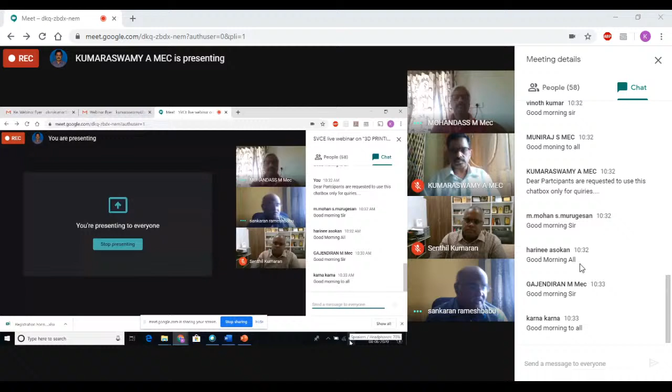I take privilege in explaining a few features of our department. Kindly bear with me. The Mechanical Engineering Department was established in the year 1985, the moment when the college was established. The department offers one UG program, Bachelor's in Mechanical Engineering, accredited by the National Board of Accreditation since 1998. And we have two PG programs, one in mechatronics and the other in industrial automation robotics. The second one, industrial automation robotics, we are waiting for approval from AICTE. I think we have a positive response from them.

And we are starting this course in the coming term onwards. The Department of Mechanical Engineering is a research center recognized from Tamil Nadu, and we have registered our research center. At this moment, I wish to mention Dr. K. Senthil Kumaran, who is one of our advisory committee members in recommending the syllabus for industrial automation robotics. We are unique in framing the syllabus for industrial automation robotics. In what way are we unique? We have framed the subject content in such a way that it reflects the current industrial scenario. So if you see the syllabus, if you see the subjects, all the subjects will be covering the key elements of Industry 4.0, and also we have been focusing more on the laboratory part also.

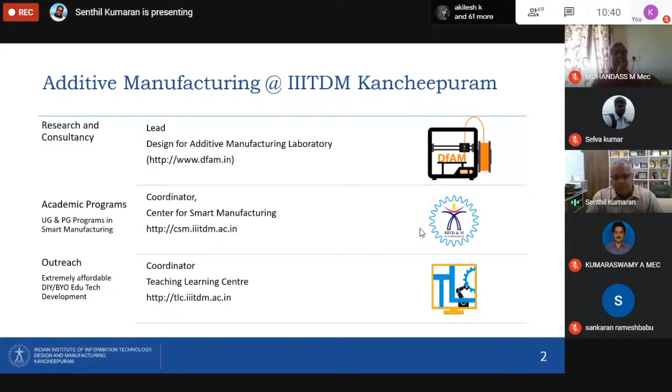Additive manufacturing has been one of the key turnkey technologies for many industries, especially for three reasons: one is to cut cost, second is to remain more efficient, and third is to introduce a new product into the market. So these are the three areas in which additive manufacturing really fares well.

Now, I have a certain notion when I say 3D printing is being adopted very fast in industry. That's because of various developments that have taken place. For example, materials is one, and then we have process, and then science, and design. Today I'm going to talk more about design rather than materials, process, and science. We do a little bit of work on materials as well as science, and process too, but today's topic is more related to design.

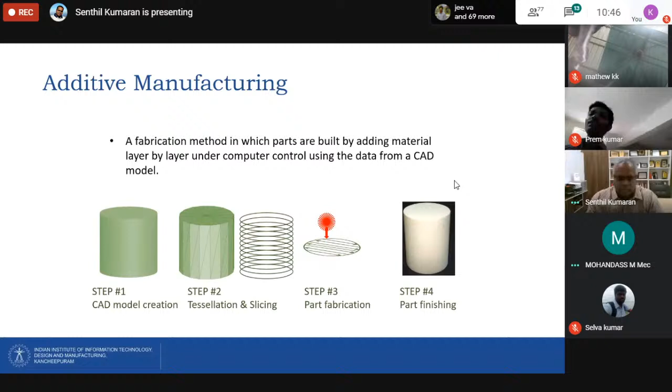Why do we need to do this? For example, sometimes you have a technology wherein you can print the entire layer, but in some technology you can only print one strand at a time. So there are technologies which could print the complete layer, and there are technologies which could only print, I would say, an array of 1D channels.

So in order to effectively classify them, you have many starting materials, like liquid polymer, discrete particles, molten materials, solid sheets, but different kinds of technologies. What happened is that the ASTM said there are too many acronyms, like stereolithography, SLA, selective laser sintering, SLS - there are so many different types of processes. Almost 50-60 processes which have been there for the last 3 decades, and 5 of them are commercially successful.

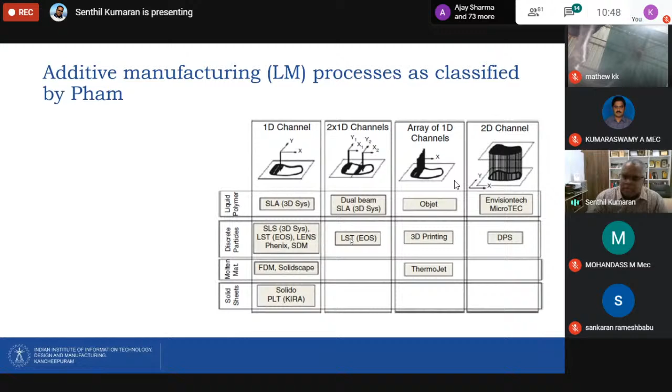So in vat photopolymerization, what we typically do is take a vat filled with liquid, and there's a laser which comes from the top and scans the liquid layer and fuses the particles together. In powder bed fusion, you take a layer of powder, put it on a platform, and then the laser comes in from the top and consolidates the powder particles selectively wherever you need to fuse the particles together. That is powder bed fusion.

Material extrusion is like an extrusion process where you have what you call a nozzle, which is a heated liquefier, and then there's a 2-pinching roller which takes the filament. So the raw material is in the form of filament. The filament comes in and fuses - the fused filament is deposited, just like a jalebi where you're squeezing or making a muruku or something like that. So it's like you're squeezing the material and making a layer.

And then you have material jetting. So essentially, which is like your normal HP inkjets and laser jets. Very similarly, like an inkjet process, you have a material which is a resin, and you are just jetting. So you use the same type of technology used in inkjet printing, but here the material is not ink, it is a resin.

So the resin is going to be jetted onto the surface by using something called, there's a similar name, a pump, or sometimes it's called a cartridge. So you have what you call drop-on-demand type of techniques, where droplets of resin are going to be deposited on top of a layer. So you have several of these techniques.

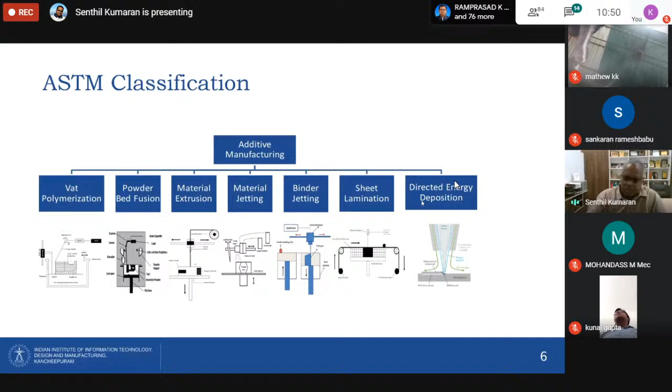The ASTM classification is usually like this. Okay, so now we are going to the design part of it.

I think this is a very important quote which I would like to tell you. Albert Einstein said the best design is the simplest one that works. So that means you have a design, but you need to make it as simple as possible. That is the idea, that is the notion.

We call this principle, probably you must have heard about it: keep it simple, stupid. So what this means is when you are designing something, you always keep it so simple, so that there are many advantages that you get out of it.

So maybe you have a design which is to be manufactured. Either it's going to be very costly during the manufacture, or sometimes it may not be manufacturable at all, or there can be some constraints. For example, the tool cannot reach, or the part cannot be taken out of the mold.

So there are a lot of issues with the design when you make it complex. The notion of simple design is to address the issues in cost, and even usage—when you are using the product, it's so simple that it becomes easy to service. So then it gets complex: design for manufacturability, design for assembly, design for serviceability, design for quality. All this design for X is going to be really difficult.

So in order to solve this issue, what people did is simplify the parts. So if you look at the design procedure, how people start designing components.

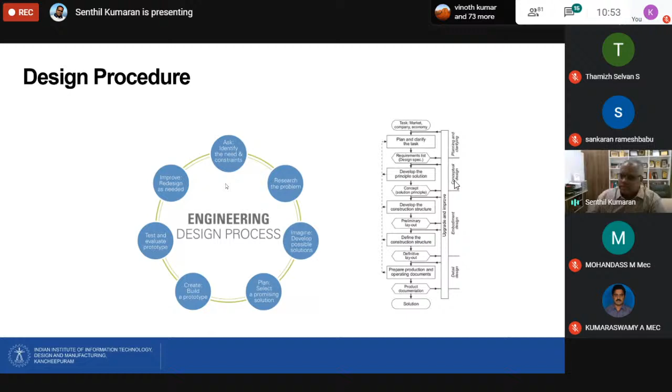To address this cyclic issue, one of the things we should look at is whether it's possible to do steps concurrently. For example, some manufacturing and testing can be done concurrently. So there are a variety of tasks which could be done concurrently.

But one of the issues is when you have a product, your cost of design is very high, and the cost of production is also very high. Let's say this is design cost, this is production cost. Now what happens is, if you spend a little amount of money in design, you spend a lot in production. But if you spend a lot of amount on design, the cost of production comes down.

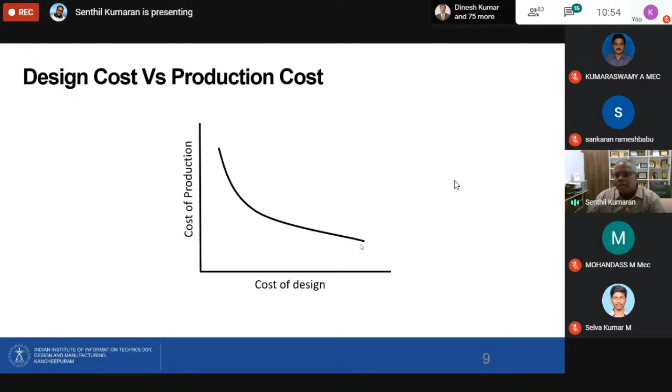So essentially, what this tells you is if you spend more time on design, catering to the needs of manufacturing, or addressing the issues early on, your production cost can be minimized. If you are able to bring some decisions very quickly early on, you can eliminate the problems you would otherwise face at a later stage. So this is the idea.

And so here comes the topic. When we are discussing this, one of the important topics is mass customization. So what we call customization, and what is called standard and one-off design. Now let's just look at this.

When we look at cost, we also look at time. If you look at the World War era and before, many standards have been developed. The entire world is made up of standards, like the building you're sitting in, the Bluetooth you are using, the IEEE standards, building codes, mass, time, and other standards. You have standards for exchange of CAD models like STEP files, IGES files. So you have standards everywhere.

People make standards to make life easier. Similarly, people make standard designs. For example, if you want interchangeability in your design, let's say you want to buy a nut here and a bolt in another continent, you can still assemble them together. That means there is interchangeability. If you are standardizing your design, you are able to replace it very quickly, and your availability becomes very large.

So standard designs have been around for a very long time. People make standard designs because they help with interchangeability, and they help address cost issues as well as availability, serviceability, and other issues.

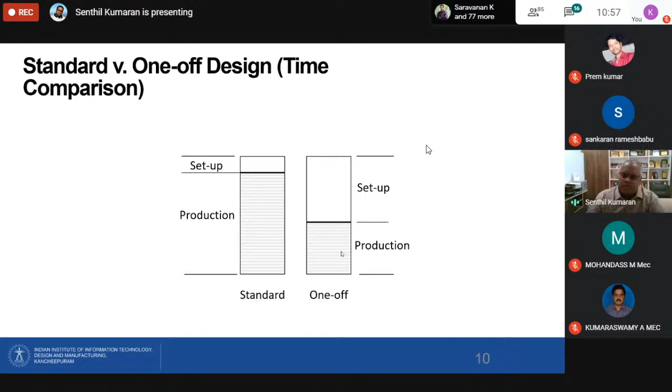If you look at conventional manufacturing processes like stamping, car manufacturing, injection molding, or even machining -- for machining you need jigs and fixtures, for injection molding you need a mold, for stamping you need a die. Making this die is a very costly and lengthy process; making a fixture is another lengthy process. Only if you hit volume, selling large quantities, can you justify this cost. So if you are making a very unique, one-off design, you are going to incur a lot of cost in conventional manufacturing. That's the idea here.

Now, similarly, if you break down that cost further, into labor cost, factory overhead cost, development cost, material cost, testing cost -- for a standard design, the total cost is very, very low. Whereas for one-off designs, you have special tests, materials to address, development issues, factory overheads, technology overheads, design overheads, labor costs -- everything increases. So in conventional manufacturing processes like injection molding, if you are making designs that are unique for every customer, you incur a lot of cost. This is the background intuition I want to convey.

So what I'm trying to tell you is, comparing a standard design and a one-off design, the standard design becomes cheaper over time. When you hit volume, you get cost benefits -- your cost gets amortized, so your total cost gets reduced.

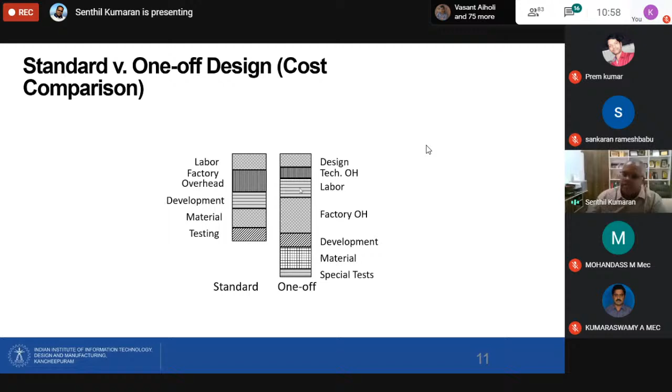Whereas with a one-off design, let's say you have a design which is uniquely manufactured, then it is going to be very costly. This is about conventional manufacturing. Here comes the mass customization angle, which we are trying to talk about today, and how 3D printing is going to help you in that.

Now if you look here, this is the mass production and mass customization curve. The one you see on top is called the mass production curve, and the one at the bottom, which actually rises to the top at the end of the high volume, is what we call mass customized. So you have mass customized and mass produced.

Essentially what we understand from this curve is that if you produce very low volume, mass production is going to be extremely expensive. Whereas if you produce very high volume, mass production is going to be extremely cheaper. So it's not going to be expensive, right?

But the problem is people are making widgets after widgets, making the same part again and again. But a lot of the time, the customer may not prefer the same design.

For example, I don't know how many participants here are women. Let's say you go to a sari shop and you see all the saris are the same - nobody will buy. You need different colors, different varieties, so people can pick and choose one, they can wear one. Suppose if you go to a shop and they have only five varieties of sari, but the shop is full of those same saris, nobody will prefer it. Anyway, you go to a car company, they have only one model, whether you choose it or not.

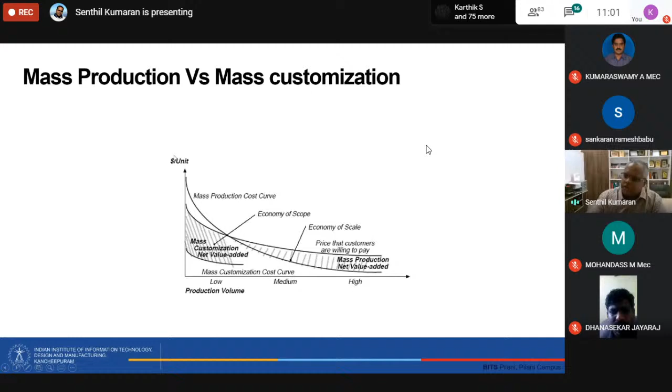But how do you reduce this dollar per unit? This is what is very important. When you are customizing it, your volume is going to hit low. At that low volume, how do you basically reduce the dollar per unit, or the cost per unit, of a particular product to be manufactured? So this slide is an extremely good slide with an example.

The same curve I'm trying to explain with intervals relating to the fourth industrial revolution, or Industry 4.0, whatever you call it. Let's say you take a car like the Model T, which belongs to the second industrial revolution. This car is the highest mass produced car - I would say the first mass produced car. The highest number of mass produced car is the Beetle, the Volkswagen car.

And suddenly you see that after 2000, people started decentralizing the production, making it distributed, personalized, and manufacturing of complex products. So essentially, what we are trying to address here is the issue that we are moving slowly from mass production to mass customization.

Essentially, we are trying to make a lot of unique or one-off parts rather than a standard design. So 3D printing actually reduces the cost if you are making only one part. Let's say you take a simple design through a stamping process — you have to make a die and then make the component. Whereas with 3D printing, you don't have to make a die, so it's a die-less manufacturing process, which reduces the cost. You can even hit the complexity factor too.

You can make more complex, more customized, and less costly individual or single parts. So conventional manufacturing may be a little costlier for this type of application. That's why 3D printing is taking center stage — it's considered to help with the mass customization angle.

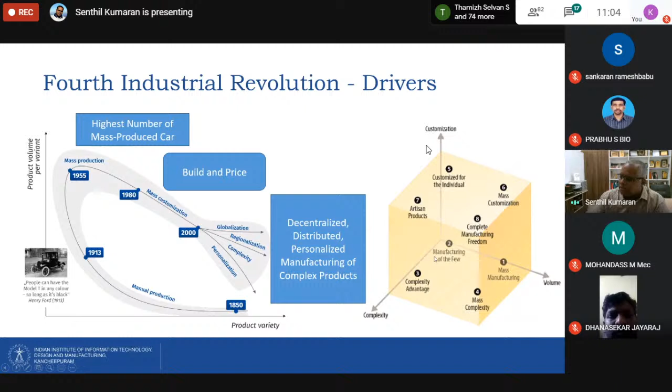So if you look here, this is what we call mass customization, this is mass production, and this is mass complexity. Let's look at this graph a little more clearly in the next slide. So what is mass customization here?

For example, you go to a doctor for footwear and want to create an insole — the insole can be customized according to your foot geometry. Or components can be customized according to your personal anatomy, or customized for individual regions or persons, or for specific applications.

There are parts manufactured only once, depending on what the customer needs — they can tweak the design and fit it to that. For example, implants: people have faced a lot of issues with implants, but now implants are custom made. People can design something unique to their body that fits exactly — dental implants, knee implants, 3D printed fixtures like dental fixtures. You're able to customize the design and make it very cost effective.

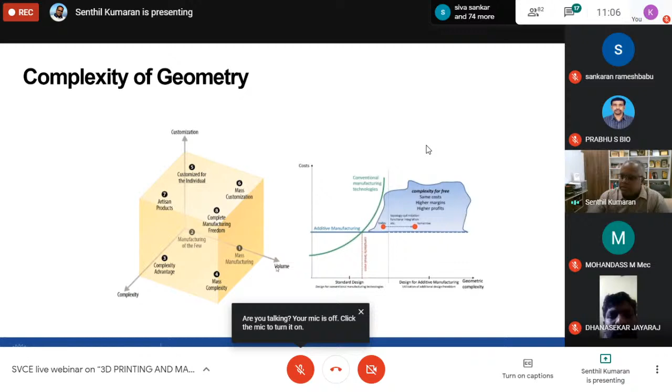That's the idea. Now, mass manufacturing with high volume is what conventional manufacturing like machining and injection molding are really good at, whereas 3D printing is good at this particular plane — it can give the complete manufacturing product and has a complexity advantage, where the design can be more complex. There are four different complexities which we'll discuss a little later.

We can have design complexity, especially called geometry complexity. We can have material complexity, hierarchical complexity, and other types of complexity. So you can build very complex parts, customize them according to needs, and also create more volume.

So volume at this point of time may be a little difficult with 3D printing, but over time, when the technologies improve and the process becomes faster, you'll be able to print more parts and build it faster. So that is the idea.

So as I said, we run a lab called Design for Additive Manufacturing Lab. One of the concepts in Design for Additive Manufacturing is, when you have more complexity versus standard design - this is the standard design, not customized. In standard design, when you design for conventional manufacturing technologies, the cost is very low.

Also, additive manufacturing is slightly not better positioned for these types of standard designs, whereas conventional manufacturing costs are lower than additive manufacturing. But when you move the design towards complexity as well as customization, the additive manufacturing cost doesn't increase, whereas the conventional manufacturing cost increases.

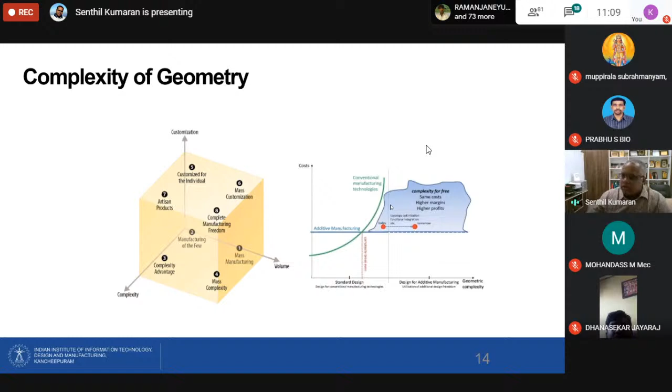So that is the idea of mass customization - the mass comes from both volume as well as cost. So now I will tell you a brief idea about what DFAM is.

I think when we are trying to address design issues, we always think design is mostly suitable for particular manufacturing aspects. Now, one of the ideas we always look at from the design side is that design is mostly restrictive. Even though we say that anything we can imagine we can manufacture, it's still not possible.

Many manufacturing processes wouldn't allow you to manufacture whatever you feel. For example, you would have seen Ford cars - they are nicely curved, whereas if you see the latest Tesla cars like the Cybertruck, they are not nicely curved.

The reason is because you have to make a bulletproof vehicle, and you have to cold roll it. The cold rolling process is not like the stamping process where you can achieve really good, nice, curved, classy surfaces. In cold rolling, you won't get the same nice curved surface - that's why the Cybertruck looks like a big box. So you have a difficulty in manufacturing that causes the design to change completely.

This is the manufacturability issue - the design is always influenced by the manufacturing process. For example, the nice curves and smooth surfaces you see are possible because some design cost has been incurred. So engineers always prefer very straight surfaces instead.

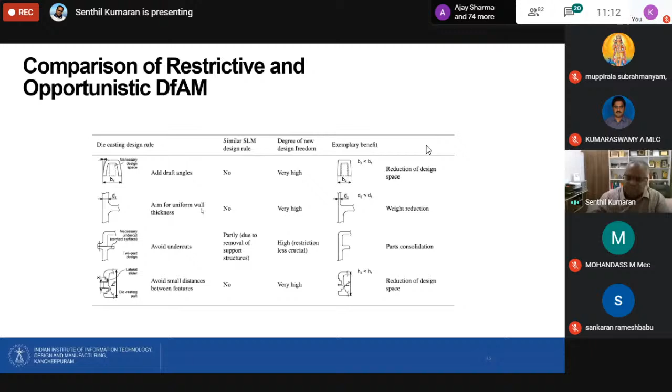So today we talked about mass customization. I will also touch on a few aspects which help you customize parts for individual needs. How do you customize a part? There are a variety of tools and techniques available where you can use these to basically customize your part.

Maybe you can use multi-materials, hierarchical structures, heterogeneous type modeling, lightweighting, topology optimization, generative design, or part consolidation. So the techniques we use to achieve design freedom, or increase the complexity of the design, is what we call design for additive manufacturing. It's like a collection of many different tools and techniques.

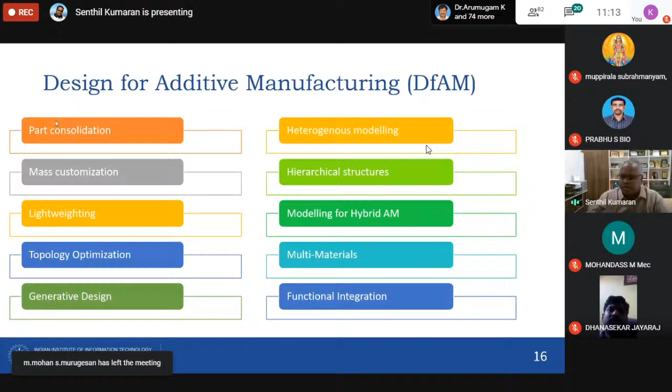Now let's look at design for additive manufacturing and what mass customization means. As I said, mass customization is customizing the design for personalization and flexibility while achieving the low cost of mass production. That is the idea of mass customization. So how do we achieve mass customization? How is it possible? How do I make sure mass customization is achievable? Now let us look at this particular slide.

There are many different tools and techniques to achieve this, including part consolidation. Part consolidation is the ability of the design—you can have so many different parts, but the problem with a large number of parts is the ability to make and assemble them. If you have a lot of issues in the assembly stage just because you have too many parts, you can consolidate them. 3D printing allows you to consolidate too many parts into one, combining them together to achieve a single part. This is what we usually call part consolidation.

You can also remove volume through lightweighting and intricate lattice structures, use heterogeneous materials, generative design, or hierarchical structure. These are various techniques. Hierarchical structure is about repeating structures at different scales—you may have the same structure repeating at a micro scale, a meso scale, and a macro scale.

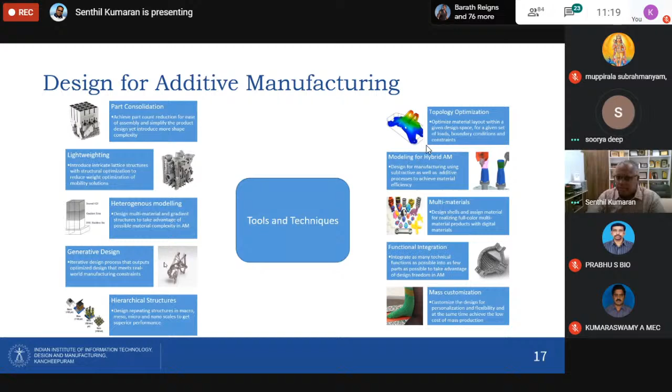Now, to eliminate that, you can optimize the geometry in such a way that it eliminates the support structure altogether. So those are the things that we are doing. I'll just quickly give you an overview of these DfAM tools, and especially I'll spend a little more time on mass customization here.

Part consolidation is the ability to combine different parts and manufacture them together, because one of the very important topics in DFM, design for manufacture and assembly, is DFMA. The conventional DFMA approach is you need to reduce the number of steps required for assembling the parts. At the same time, you need to take care of servicing concerns, for example, you need to remove the parts sometimes for maintaining them over the use case life and things like that.

So essentially, the general principle is to reduce the number of parts. You can combine many different parts into one, so you can achieve part count reduction, which eases assembly. Conventionally, it may not be possible, but additive manufacturing makes it easy to do this.

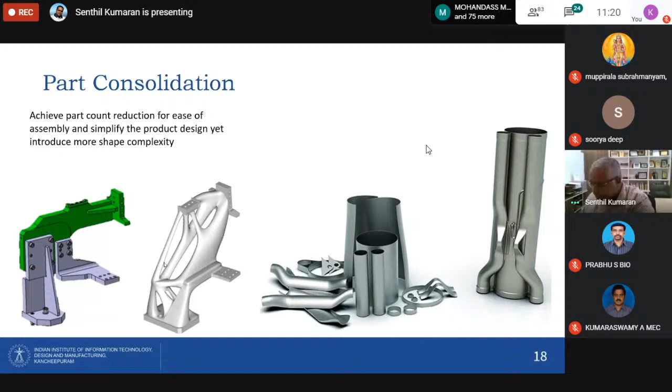Okay, so mass customization. We've been looking at mass customization from a variety of different angles, but when we look at the end applications, the ones you see in the background color, these are all parts of different designs. Now let's say you want to iterate using generative design, an automatic procedure to generate alternative designs. Let's say you want 1,000 designs or 1,000 variations of the same design, these can be generated using artificial intelligence techniques, where the AI learns from design constraints and design techniques to generate varieties of design alternatives.

Let's say you have one design, but it could be generated into several hundred designs, and each of them can be manufactured. I'll give you some basic idea about a medical application, and then probably I'll tell you about generative design, what it is, and how it can be used.

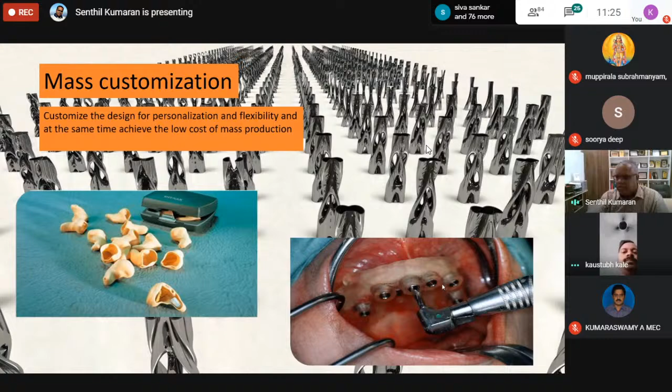So you are able to customize this for individual patients. Each patient is going to basically have designs made for them. Do you understand that? So as we progress further, you see that we are able to design customized solutions for individual needs.

At the same time, you can also tailor properties, customizing the properties within the material. So we are talking about personalization. Personalization is the ability to change the design according to the needs of the human. But is there a way to customize the design according to function? Let's say, for example, you need a part which has different functions.

I think nature does that very nicely. For example, if you take our bones, they are strong enough at the edges, whereas if you go to the center, it's like we have different regions. The marrow region of the bone is not that dense; its density is very, very low. That's because it can actually transport materials and nutrients through it.

So that's why you have variation in property. Even if you take a bamboo column, you see different gradation in property because nutrients have to be transported at the edge. At the edges it could be very strong, but at the center it could be very weak. So you see variation or customization of design with respect to function. That is what we call a functionally gradient structure, or functionally gradient materials - the ability to design something which varies over its function.

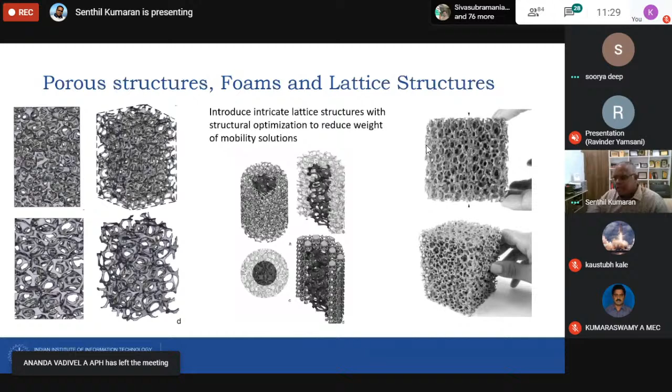the powder bed fusion process. In powder bed fusion process, essentially we use a laser beam. Usually we use 200 to 300 watts for a metal and 50 to 60 watts for a polymer. Most of the metal powders that are successfully 3D printed now are Inconel, steel, and other alloys like cobalt chrome, aluminum, and titanium.

They have been commercially successful, manufacturing parts out of that. One of the issues with these materials, especially titanium and others, is that they are extremely costly.

Aerospace industries call this the buy-to-fly ratio. When you take the conventional route, let's say machining a turbine blade from a big stock of titanium, you waste too much material as chip. Instead, if you build the part with 3D printing, you are only building the near net shape, eliminating the need to waste material as chip. So essentially you achieve very high material efficiency, a low buy-to-fly ratio.

Because these materials are costly - you know how large aero engines are, with titanium blades and titanium casings - they are extremely costly. So if you can reduce cost by cutting down the unwanted loss from chip production, you can go to additive manufacturing.

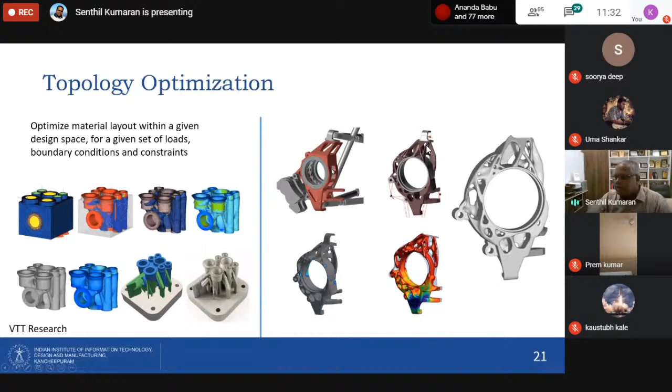So you have a variety of topological optimization techniques which could be employed. This is the basic step - let's say you have a link like this that you want to topologically optimize. You can find out the part which is to be optimized, and this is the final optimized part. You can see how the part changed from this to this - this is the topologically optimized final part manufacturing.

These are the steps in topology optimization. You start with the 3D model, and then you have to de-feature the parts.

Right now, you would have seen that there are too many holes being machined here. These holes are typically machined just to do weight reduction. Remove those holes which are only for weight reduction.

It's because we are going to do the complete weight reduction here, which is called de-featuring, and then define the areas which need to be preserved, define the areas which need to be where the material needs to be optimized. Then you create an ideal shape where the stresses flow, and then you finally get a component from like this. So this is the component. From this component, you are able to get to a component like this. And further, you can even do weight reduction by introducing lattice structures.

So the ability to utilize topology optimization to start from a design, which is a conventional design. I think all of you agreed that this design is primarily because it is to be machined. When you are trying to machine, you see that they kept these straight pockets. So these are pockets, these are holes, and there are steps and profiles. You see that in a single CNC milling machine with multiple setups, they must be able to machine it. Or probably if they have a near net shape from a casting, they can machine it, or maybe in die casting, depending upon the size of the parts and how it is manufactured.

We have a primary process and then machining, and then subsequently grinding and all those processes. So essentially, we have eliminated the complete primary secondary process. We just use powder particles. Then from the powders, we are able to basically understand how this particular part can be optimized from this to this. So now you can see the design complexity and the shape, as well as the material efficiency and everything which is achieved just because you are able to optimize the topology.

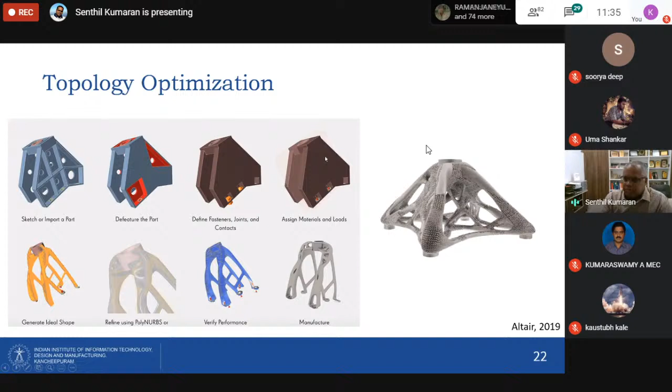Whereas in generative design, for example, this is how the input is. We don't give the starting design there. But we'll define the preserving geometry and the negative geometry. A negative geometry is like a geometry which doesn't need to be optimized, where the material cannot flow.

So in topology optimization, we are solving, let's say, trying to minimize the compliance. We are trying to optimize the solution by understanding the current load profile, where the material stress actually flows and where the material needs to be kept. But in generative design, we do the same thing, but here we define something known as a negative geometry where we do not want the material to be, and we allow the material to flow in most of the directions around that.

So in that way, you are able to basically identify many different solutions that exist within that point. There may not be only one single solution, but there could be many different solutions. That is how you can customize the design. So the ability to customize the design automatically, based on just the material layout, means you can actually have hundreds and thousands of designs. I'll show you the variations in designs that have been generated.

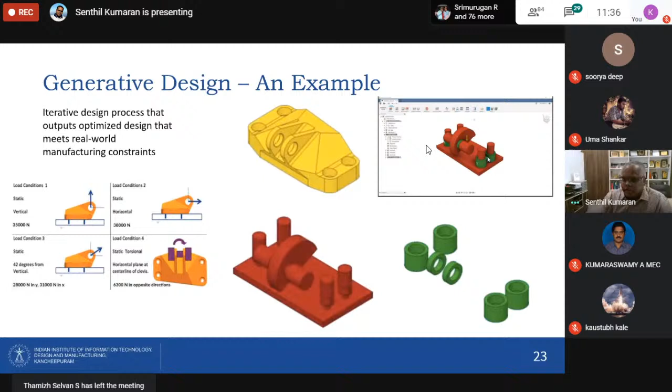For example, you gave a mass target, like I want to reduce 1.5 mass from the spot. So essentially, we are able to get so many different variations of the design, too many variations, without having to individually sit and optimize each individual design.

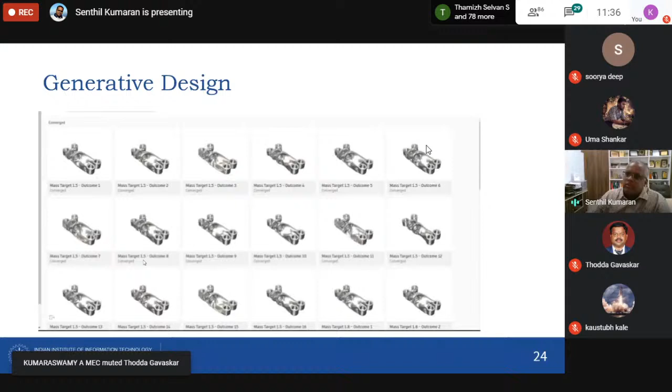So you are able to customize, optimize, and generate many variations of the design by simply using topology optimization with generative design principles. You can see there are many different outcomes. This could be an important decision-making tool to help identify which one will work fine, or maybe you choose 10 and identify a customer who likes this design, or a second, or a third.

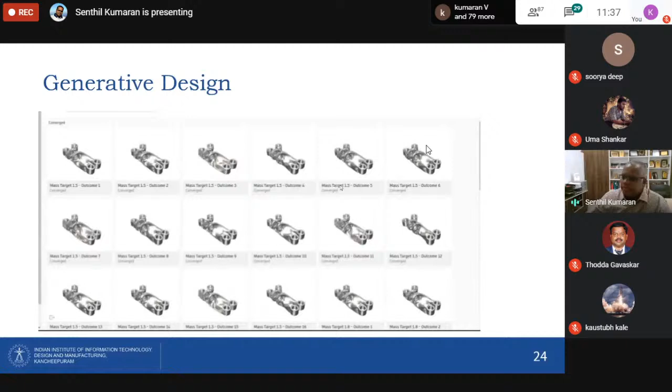You can choose 100 designs, and those 100 designs can be manufactured for 100 different aircrafts. This is the idea of mass customization, the ability to make variations in the design that are functionally the same, but different geometries could be produced. So you can see here, there are hundreds. You're able to hit the variety here, so the volume is high and the varieties are also high. Each part is completely different.

So why do we need to do this? Conventionally, you may not be able to look at this design and say, if I want to manufacture 15 designs, the cost for each would be very high because they are one-off designs. In conventional manufacturing, if you're making only one part, the cost is more. With generative design, you can make 100 designs at one go, nest these parts on one build platform, and build them all overnight within 24 hours, depending on the total build height. You can build this entire set of different designs in one night, or one day, or maybe two days, depending on the bounding box dimensions of the design.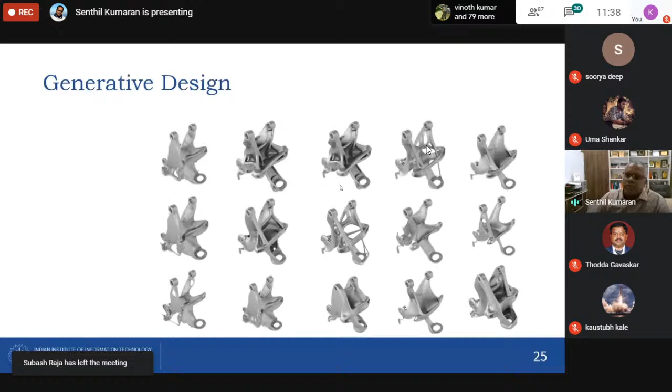As I was talking about lattice structures and bamboo culm, you can also have heterogeneous objects. You can design gradient structures, put material where you want, and tailor the properties. This is customizing the properties. We said customize the design based on personalization; this is about customizing the properties. Let's say you want certain properties or certain materials in certain regions, you can do that.

Most of us have seen that if you take a simple toothbrush, when gripping it there are some elastomers and hard plastics, and the bristles are usually elastomers, or fibers. When you have an elastomer, the body is made of two materials, and when you have two materials, they have an interface. For example, take a brand like Oral-B toothbrush—you have a hard plastic and a soft elastomer, and both have to have good bonding.

So people would have tested these two materials. Let's say you have an injection molding machine: first inject an ABS plastic to get the handle for the toothbrush, and for the elastic gripper you can do a multi-stage injection molding, or inject two materials in one single mold. That is also possible—there are varieties of ways this can be manufactured. But there is a clear boundary between the two materials, so it is not graded.

Whereas in natural objects like bones and bamboo, there's a graded property—they don't merge with a marked boundary, but actually merge nicely, like a gradation. There's no marked boundary; instead they merge, creating a graded region where both materials exist together.

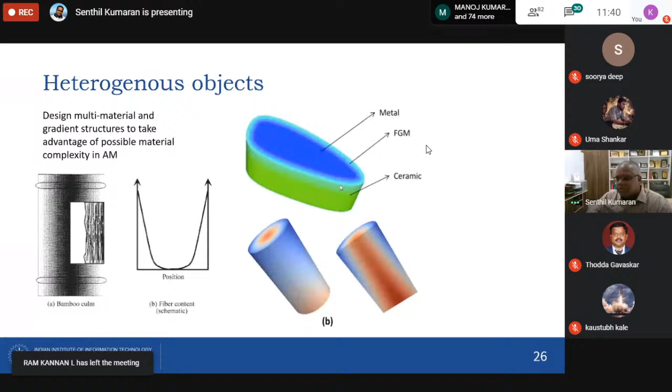This is one example of a part typically modeled this way, where you can get different material properties in different directions. You can see this part has different variations—two different materials, let's say dark green is one material and blue is another. You can have a graded property so that they nicely merge into each other.

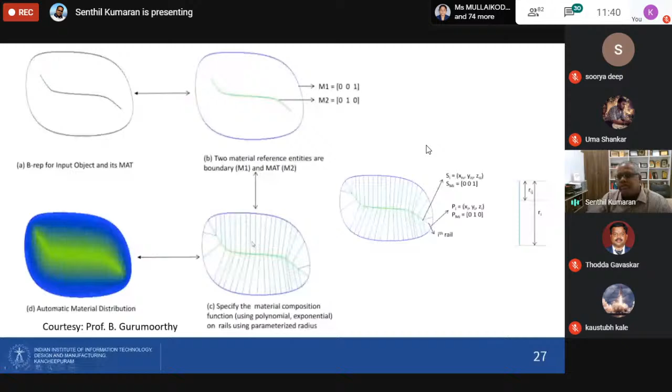It's not at one boundary that the green becomes blue or the blue becomes green. So essentially, along these rail curves, you are able to get a nice variation of the property along this curve.

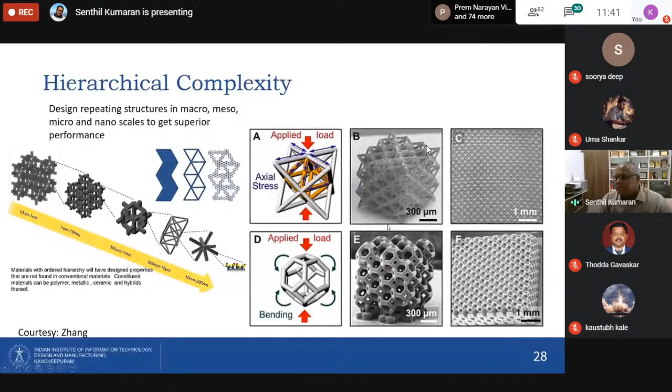So what is hierarchical complexity? In hierarchical complexity, you are able to design repeating structures. These repeating structures exist at macro, meso, or nanoscales. For example, these are different scales, each with the same repeating structure - this structure repeats itself across multiple scales. This gives you really good strength, and properties can be customized and tailored.

For example, the way to build them is you take some zeroth order geometry, and you do the octahedron of octets, and then the second order, and again the third order. So it feels like you are repeating the same geometry at multiple scales. If you go from one scale to another, you will see the same structure repeating - that is basically a hierarchical structure.

These are ways in which you can design. There are design tools available right now, commercial software tools, to design something like this where you can remove material. It's not lattice, but it may look like a lattice - it's still a structure repeating at multiple scales. The way to achieve this is you take a simple original shape.

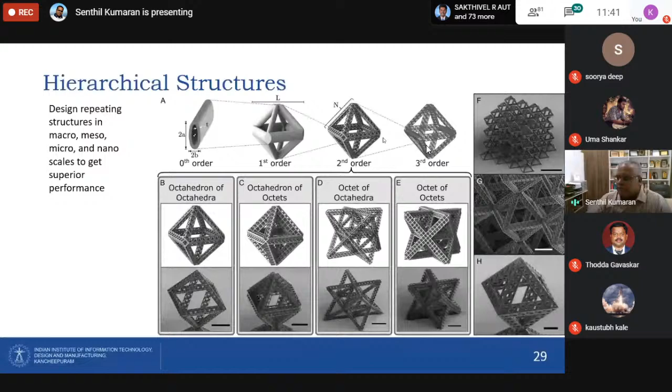In level one you join them like this, and level two join them like this. You see the same simple square shape being repeated at multiple scales in multiple directions. That's how you can create a hierarchical structure through generative design.

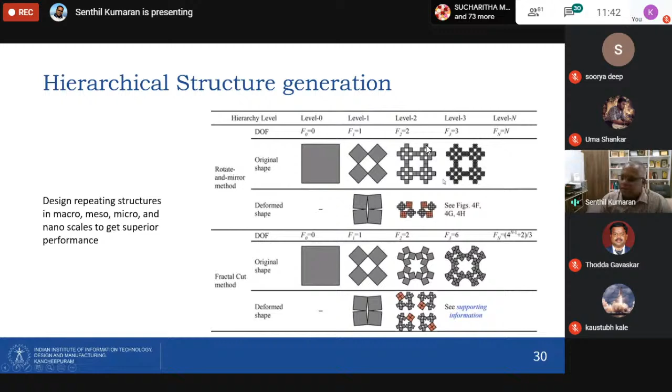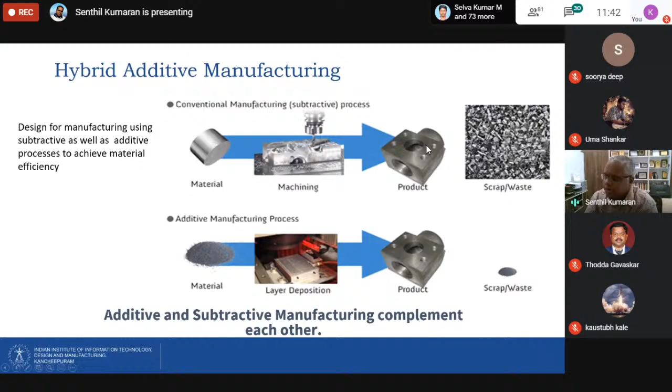So here I was talking about the case study on turbine blades. If you remember, I was telling you that buy-to-fly ratio is important - we need to reduce the scrap that is wasted as chip. Hybrid additive manufacturing is one ability where you can customize the design, as well as achieve material efficiency.

As I said, you can take one single part that could be manufactured by both conventional CNC as well as additive. Now, I was talking about a few issues - one is about bringing the conventional process into additive, so instead of making them more competitive, they could be compatible to each other, complementary to each other.

CNC is very costly, but certain functional performance like tolerances are only achievable through final machining, finished machining, which additive manufacturing may not give. So you combine the best of both worlds.

So here in this case, they started with the deposition, the DED process, and then combined the milling process. You can see milling, deposition welding, milling again, deposition again, milling - so you're able to get a thruster-like part. This is the ability to combine multiple processes.

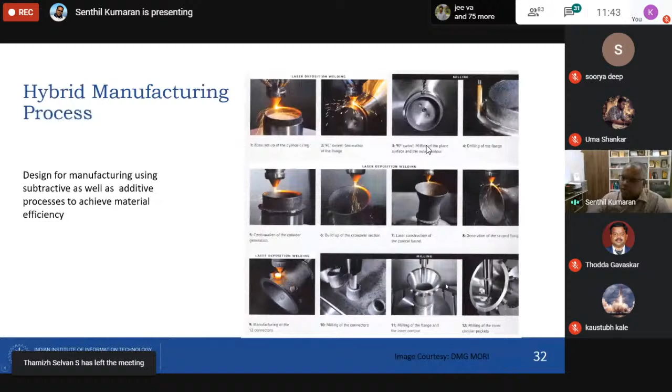So this is about material complexity. As I said, multiple types of complexity are possible - we're looking at the complexity angle, the variety angle, and the customization angle. This is about the complexity angle.

In material complexity, you can see that compositional heterogeneity can be achieved - you have copper 100% at the core and nickel 100% at the outside, so you get a gradual variation. That 100% copper becomes 90 to 100% nickel - the transition from copper to nickel is not sudden at one boundary, but gradual. This is the ability we call material complexity.

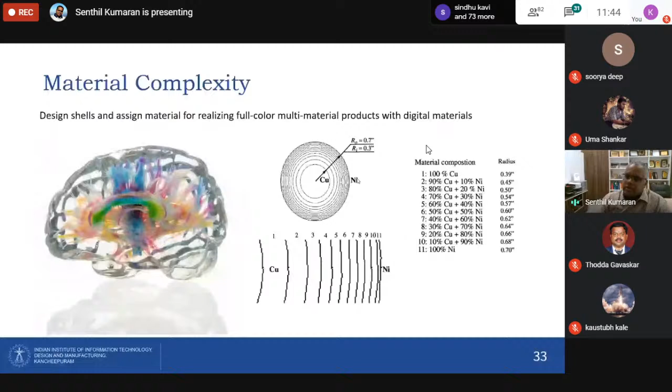And it could also be functional complexity, where electronics and other components could be embedded. Functional complexity is like, when you are customizing, when you are designing, it should also serve multiple purposes for doing many things.

For example, when you buy a mobile phone today, you want it to do everything - hear music, use it for calendars, take pictures, schedule meetings, use it for navigation, GPS, and all those things, with many sensors. So essentially, when customizing a design, make sure it performs a variety of functions - for example lubrication, cooling, thermal management, structural functions, heat transfer, electromagnetic.

So electronics, maybe sensing, could involve a sensor. You design something such that it could be multifunctional, so multifunctionality can be achieved. For example, if you have a porous object, it could be really good for lubrication. I think you must be knowing that powder metallurgy is the preferred route for making gears because the inherent porosity helps in some cases, especially for lubrication properties.

So here you can tailor the porous structures. Essentially you are able to understand the regions and customize the design based on different functionalities. Let's say in some region where you want heat transfer, or some region where you want weight reduction, some region for avoiding electromagnetic interference, or some regions where you have fluid flow, optimizing the fluid flow, or sometimes some places you want a good surface finish, and some places you have a very good structural member. So the same design, when consolidating, you can add all these functions to it.

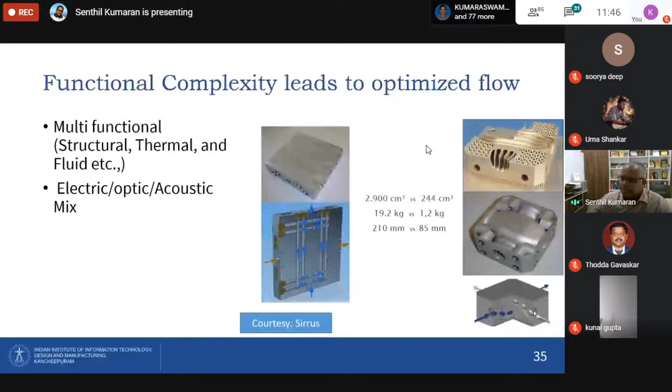So you have a forged part - typically this is the conventional manufacturing process. People usually machine it for weight savings, right? So this is what you see. But now you can actually fabricate an optimized part with, let's say, lattice structures and hierarchical structures, and also functionally embed electronic circuits and antennas. You can see the antennas, sensors, circuits - everything integrated into one single mechanical part.

So you can 3D print an entire part, and it is fully functional. You don't have to assemble electronic circuits into it, you don't have to put an antenna, you don't have to put a sensor, you don't even have to optimize it separately for weight saving and things like that. So essentially it's about the ability to customize individual designs based on whatever need you have.

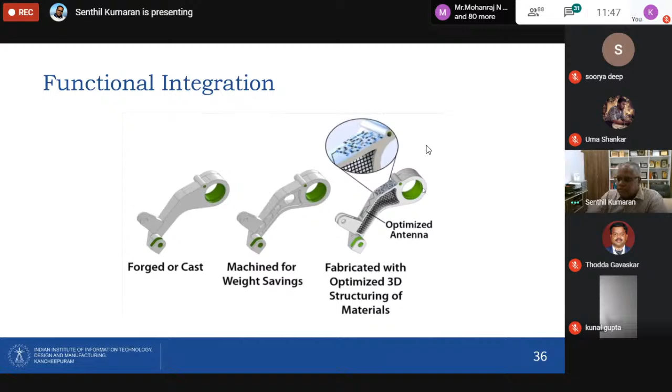So this is a busy slide - I'll send it. This slide tells you about the various advantages of using this design approach for additive manufacturing. Now if you look here, we have so far looked at four different complexities: functional complexity, form complexity, hierarchical complexity, and material complexity.

Now mass customization, when we talked about it, is about the ability to reduce cost because of the variation in design. Now all the restrictions in design - like internal walls, ribs not being possible, wall thickness combinations not possible, the need for draft angles in conventional processes - are eliminated. That means you're able to get good form or geometrical complexity: large aspect ratios, undercuts, even big cross-sectional changes, and variable radii is possible. So you get too many advantages out of it - this is the idea of form complexity.

In hierarchical complexity, you have porous structures, mesoscopic structures, surface structures, low wall thicknesses and things like that, so you're able to get very good hierarchical complex parts. Also continuous material transitions, like functionally graded structures, and multiple materials - electronic and mechanical functional materials in one part, sensors and things. So you have different materials, and you're also able to get relative motions.

Sometimes when you try to do part consolidation, the conventional rule is that when using DFMA, like Boothroyd or other studies, you need relative motion - suppose you cannot eliminate a battery. Conventionally, a battery needs to be a separate component that can be changed because it cannot be integrated. But right now, many companies are printing batteries directly onto the surface, so you don't have to embed these components at a later stage - you can bring them together.

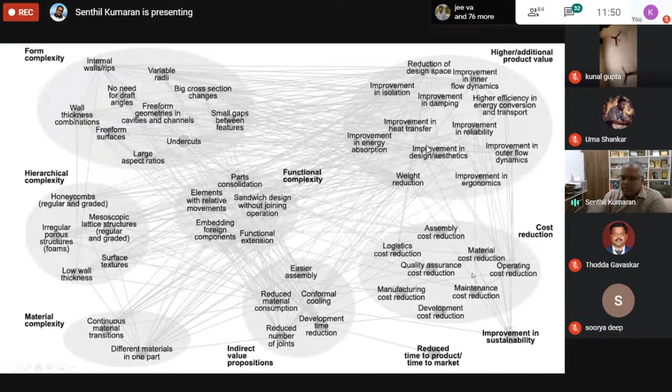Now, what are the limitations? The limitations are like different strength, different surface finish, different speed, and cost. Some participants from this webinar were also asking me the same question - what are the mechanical properties? You are saying this is possible, so I think I painted a rosy picture of 3D printing, but 3D printing also has its own limitations.

For example, 3D printing cannot print at much higher speed, whereas injection molding can achieve very high speed. So the notion of rapidity, the rapid manufacturing, comes from the fact that we are able to combine different designs into one. The rapidity is essentially because we are eliminating the intermediate process called mold making, die making, or fixture design and things like that.

So speed is an issue because we are making it layer by layer. Each layer takes 10-15 seconds, or sometimes each layer takes half a minute. Let's say you have a layer thickness close to 50 microns. So essentially, a part like 30-40 mm could even take hours to build. That's the reason why it's a little slow. So the speed is slow.

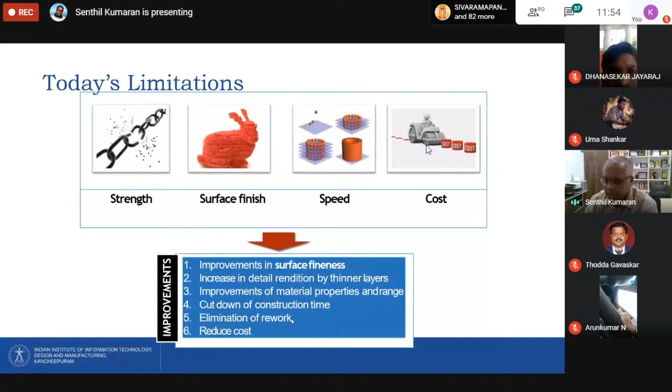As I said, this is a full course, a 40-hour course. Mass customization alone is a 3-hour lecture that we do, so essentially we need to cover this in a full course. But I try to give a glimpse of what we do in that DFAM course. Hopefully I'll try to answer a few questions, and I'll hand it over to the Professor.

Yes, sir, yes sir. Thank you, sir, thank you so much.

This session is a wonderful, eye-opening session for many beginners and researchers in additive manufacturing. The Professor explained the advantage of 3D printing technology, especially in mass customization to reduce cost, and also how topology optimization can be done to reduce weight as well as cost. Thank you very much for your wonderful session, sir.

Now, if any participants have queries, you can type them in the chat box. One question raised by a participant: is it possible to produce components with metal plus polymer composites, sir, using 3D printing?

It's a very interesting question. When you have two different materials, it is possible, but not in a single process. Metal and polymer have been mixed together and made. For example, the early machines we had in the 2000s used a material called Alumide, which is aluminum plus polyamide. We have Copperamide, which is copper plus polyamide. We also have a material mixed with stainless steel powder plus polyamide. So we have mixed polymer powders and metal powders together. It is possible, and people have been making parts like this for almost 20 years.